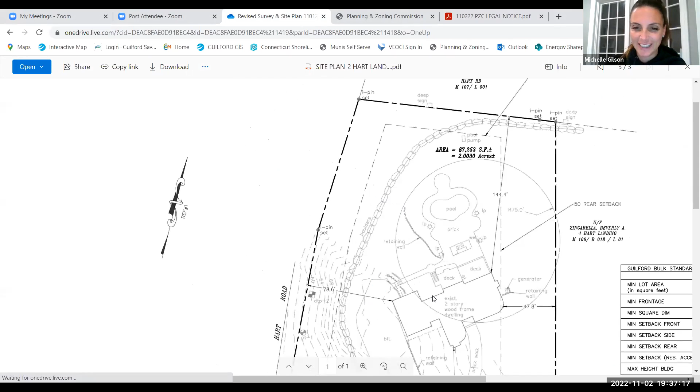So Michelle, do you want to explain for us what the commission is looking at? Oh sure, sorry, this is my first time. So right here is a shared driveway. My home is right here. And right across from here you see the gravel driveway on the bottom, and that leads to this modular building that I'm planning to put in as the accessory apartment. It's a little under 500 square feet, and it's directly right across this shared driveway, which we own this portion of, and it's right across from my house.

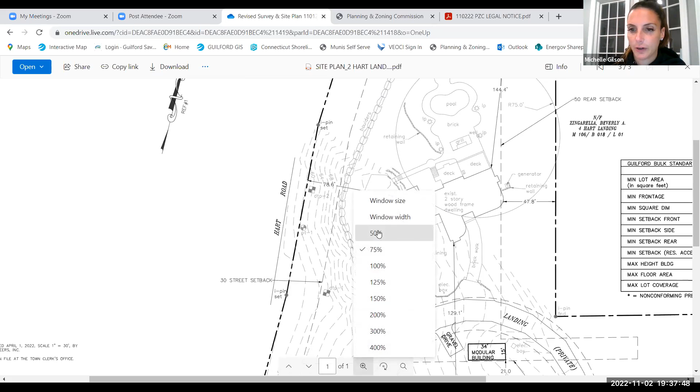What is the plan for, I assume there's functioning facilities. I want to know what's the plan for septic? I've already gone through the septic process with Shirley, and my house had a large enough septic system to carry this, and we've already gotten the approval from the state. Is there another drawing with the septic system shown on it, I think, isn't there? I believe, yes, there is.

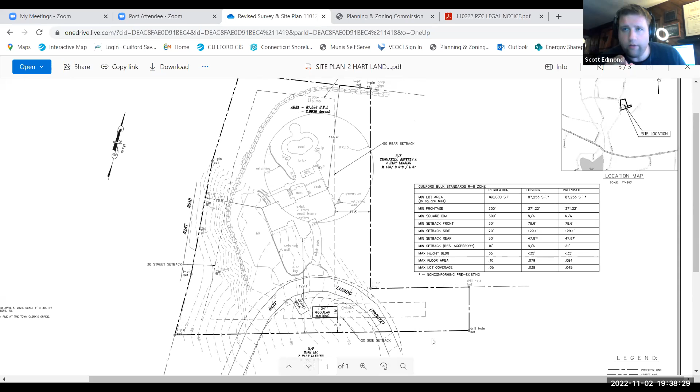Is there another house at the end of this road? Are there other cars that are driving through on this road? Yes. But that is your lot that it's on, correct? Correct, so the driveway is on my lot.

Okay, if there's no other immediate questions, we have some memos here. No, not yet. All right, let's grab memos. Hold on one second. Oh, those are all Little Meadow memos. Scott, we do have one from... Memos, yeah, do you have one you could put up, Jamie? Yeah, I can, just one second. Mr. Phil Johnson, would you please read the memo for us? As soon as it pops up. Yep, one second.

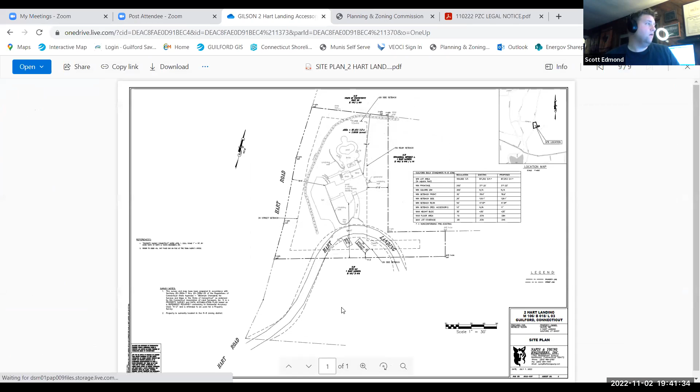No, that's the old one. I think this is the old plan. Is this the one that shows the septic, Michelle, or is there another? No, no, that's the first plan that I had to change, that had the 10 feet. Right, yes, okay, thank you. So there should be another - they did attach a new septic plan with the site plan that we updated yesterday.

Okay, I think these are the house. It must be in the revised folder. Yeah, I think maybe it's this second one - the septic plan. Oh, septic plan, thank you. There we go.

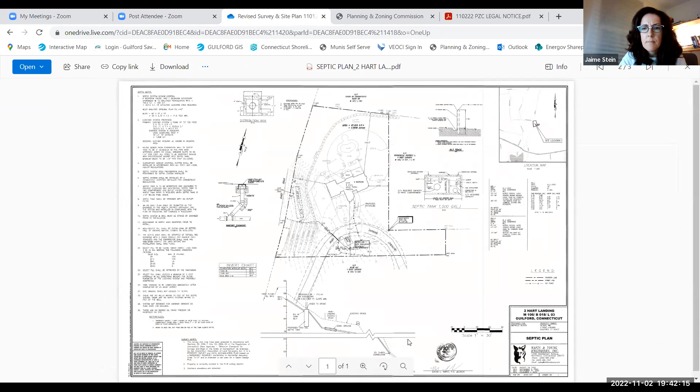Zoom in a little bit. It's a very good sized septic system. Okay.

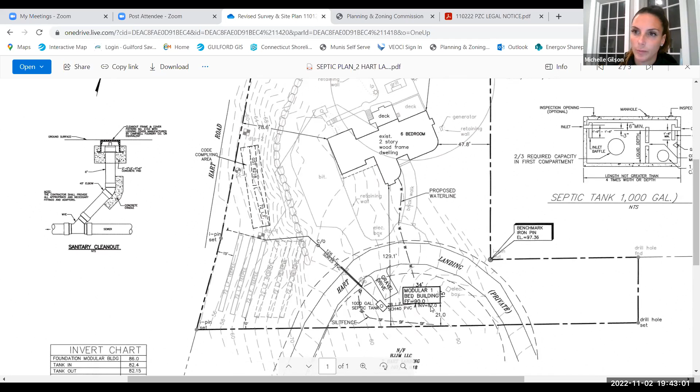That's showing the water line here. So basically it looks like you rotated the orientation of the building to accommodate for the setback? Yes, I originally had a miscommunication maybe on the size of what the structure was going to be, and I was told it was supposed to be 10 feet from the exterior line, so that's why my first design was with the 10 feet. But I read the memo yesterday and called and got it taken care of so that it was at 20 feet when we had the meeting today. Thank you, sorry, just asking.

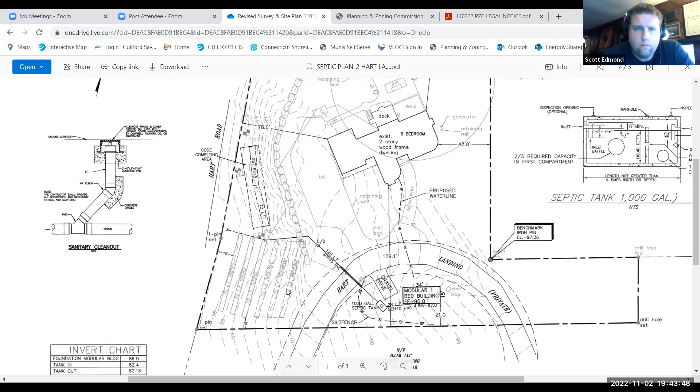Let's see, yeah, so it goes to the tank and then gets pumped. Great, any other questions from commissioners? So it looks - is the septic to the left? Yes, well, the left is a tank that would get pumped to the leaching fields. Got it. I think it's all gravity. No, I don't think there's any pump. Right, sorry, yeah, I just misspoke.

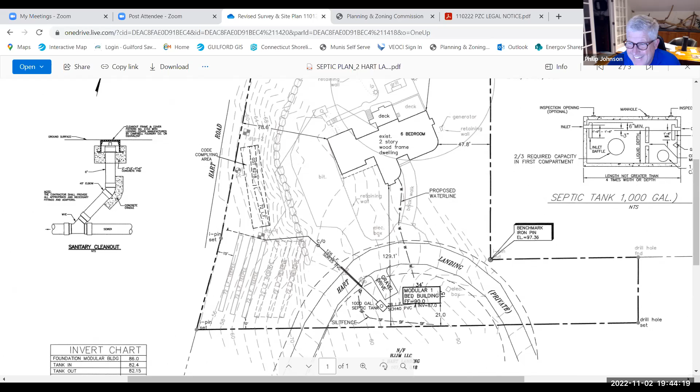Well, I think this is exactly why we have kind of liberalized our accessory apartment dwelling unit regulations, to allow for just this type of thing. Is there any drawings of it? Not that it's critical to the process, but I was just curious. It's not a trailer, right? We have a whole slew of them. Good. Yeah, I mean we should look at it because it's part of a special permit.

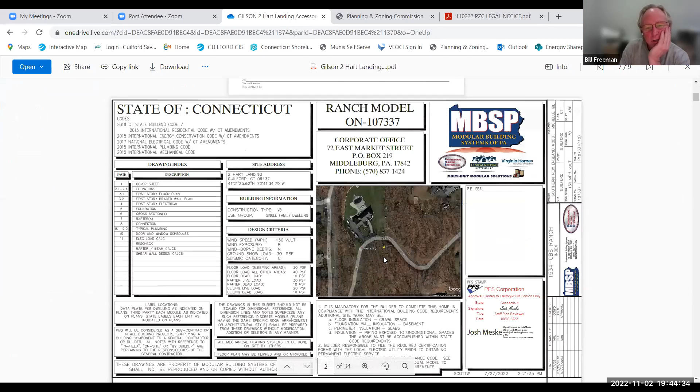Plans. Oh, I didn't scroll down. I was like, oh, I'm not going to... there you go. Mhm. Oh, I like that.

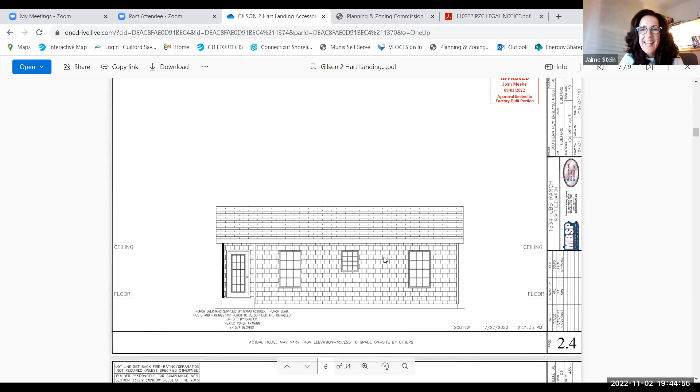My mom's only 4 feet tall, so it's perfect for her. Sure, she's happy - you just let us know that too. How old is your mother? She'll be 64 this spring. Young chick. She'll be with you forever. She's been living with me almost 8 years now. We're ready, but she's a big help - you're big getting her help out of the house.

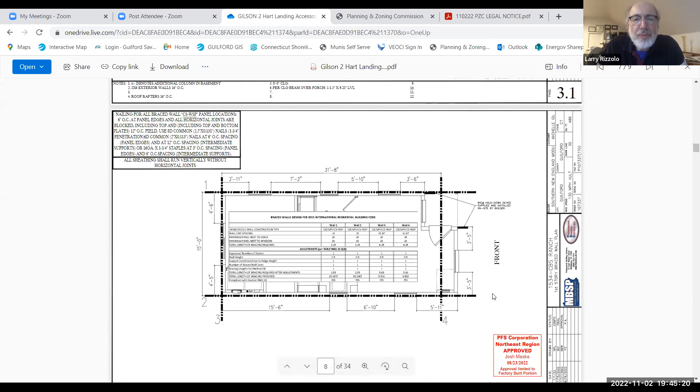Yeah, so she has to leave the bedroom, walk through the kitchen area and around the corner to get to the bathroom at night? Yes. Well, that's because you need it as a guest bath, I guess, as well. Otherwise it would be the other way around. Why would - just a silly question - why wouldn't you put the bathroom closer to the bedroom and the closet on the other side? But it doesn't make any difference at all for us, just throwing it out. I actually don't mind - I like it pretty small, you can walk pretty quick.

It's actually as big as a room that I have in my house, so it is pretty small. I did go with the design that I was presented with. I made a couple modifications, but as far as the layout went, I kept the layout the same. Yeah, it looks great.

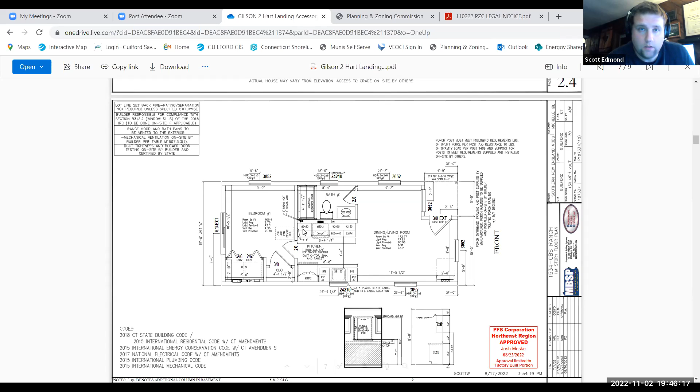Any other questions from commissioners? Thank you, Jamie, for sharing. All right, so we'll throw it to any questions from the public. Seeing none, is there anyone that would like to speak in support of this application? And is there anyone that would want to speak in opposition to this application? Not seeing any, I throw it to commissioners.

How do we feel about the option that we have to waive a second public hearing on this special permit? Make a motion to waive the second public hearing. Second. Motion from Phil, second from Frank. Discussion? Okay, looks straightforward, let's do a roll call vote.

Roll call vote: Kevin Clark, yes. Bill Freeman, yes. Philip Johnson, yes. Frank DeAndrea, yes, sir. Larry Rizzolo, yes. Ted Sands, yes. And I will vote yes.

Any other things we want to discuss, or do we want to close the public hearing on this item? Make a motion to close. Thank you, second. Second, thank you Frank.

Discussion. All right, Kevin Clark, yes. Bill Freeman, yes. Ted Sands, yes. Philip Johnson, yes. Frank DeAndrea, yes. Larry Rizzolo, yes. And I will vote yes.

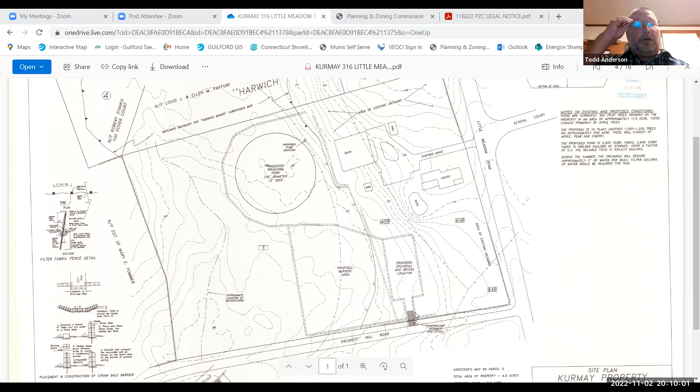And just while I'm talking, I read through Janice's letter while you guys were reading Kevin's letter. And I want to touch on a couple of things that she said about that access being a permanent driveway.

It is not intended for this entrance to be permanent. The stone wall in that area will be moved to the side, preserved, the construction entrance put in, and then at the termination of that project, the tracking pad be pulled out, soil be put back in place, seeded, and the stone wall be put back in place.

If at any time Mr. Kurmay chooses to have another entrance into his orchard, which I don't think he's intending to do at this moment, of course, we would have to go to the engineering department and do the permit for an entrance, as is the case with anybody that wants to put a driveway in. But I believe at this point, his intention is not to have a permanent driveway there. So those are a couple of things that I want to just touch on there.

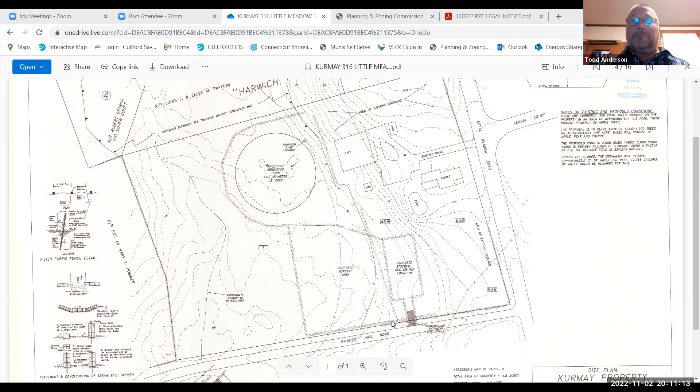Okay, this is to Planning and Zoning Commission from Sonia Marino, RSMPH, November 2nd, 2022. 316 Little Meadow Road, map 86, lot 2. The proposed pond on the above referenced property has an adequate separation distance to the subsurface sewage disposal system. Staking out the septic system to protect it from being driven over during construction is recommended.

Thank you. Mr. Anderson, do you have any problem with staking that recommendation? As long as I have an as-built of the septic system, but I believe Mr. Kurmay knows where his septic system is, and I believe we are nowhere near it. So no, I have no problem with that.

All right, and then the last memo here, we'll have Kevin Clark please. Okay, to Planning and Zoning Commission from Janice Plesiak, Town Engineer. I have reviewed the special permit application for the above referenced property. The project proposed an irrigation pond to be built on the property for fruit tree cultivation. The pond final water or top of bank elevation should be shown along with proposed grading around the pond since the site is slightly sloped.

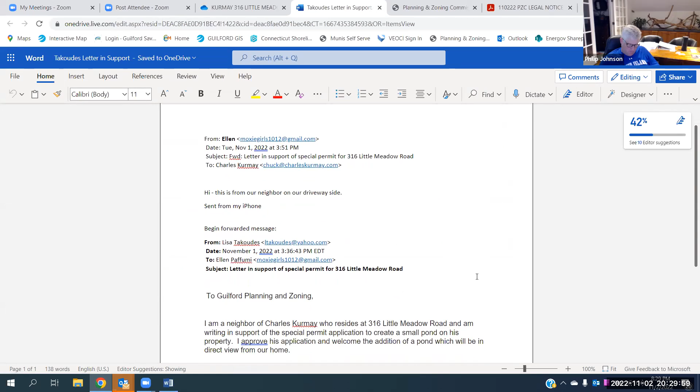Are these neighbors in proximity to the property? I'm not exactly sure. Yeah, it's the next town, the next road, the other side of the property, the next road. Okay. It's next door, basically. Thanks. Yep.

Although I would point out, Mr. and Mrs. Paffumi are the property immediately to the north of where the proposed pond is. They're on Dover Court though, right? Right, but their property is immediately adjacent to the location of the proposed pond.

Got it. Right. And I note here, that pond is directly in our backyard, can be seen quite easily, particularly in the winter months, from the back of our house. And I just want to say that we are totally in support of the project. Chuck has done a beautiful job with that property in the 20 years or so that we've lived there. It's never looked so good. He has a vision for the property, and in my many conversations with him, it's evident that he's entirely sensitive to the environmental impacts of whatever he does, and he does things right and with a lot of thought. Thank you very much.

Is there anyone else on the call that would like to speak in support of the application? Scott, I'd just like to note that a lot of the letters say the author can see the pond, can see the property, and one noted how much the sight lines at the intersection were greatly improved. Sure, so that's already been done.

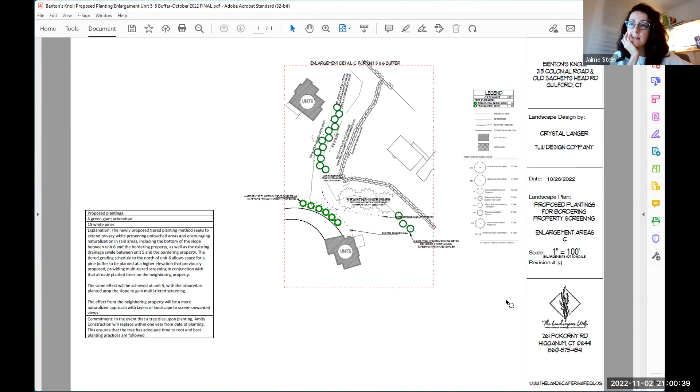So how many more units are left in there, Jaime, do you know? Unit 6 will hopefully get its certificate of occupancy by the end of this year, and there's one more lot yet to be built upon. It's under contract, and they're drawing up the plans now. Excellent, thank you, Jaime.

You're welcome, but we don't need to act on this, you're just giving us some information, correct? Just giving you an update. Great, thank you. Anything else, Jaime, that we need to discuss or any announcements for us?

Nigel, you drinking from the fire hose or what? Come again? Drinking from the fire hose. It means you got a lot on your plate. Never heard that one before. It means you've got so much coming at you that you can barely handle it. Oh, it feels like it sometimes, but I guess that's why I was hired.